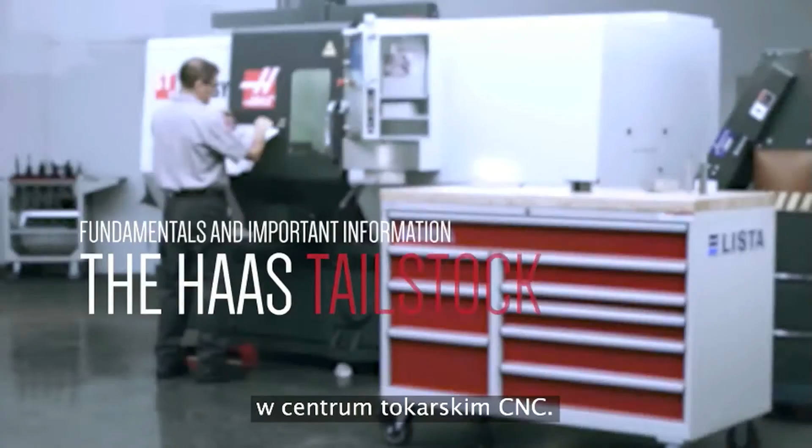Today, we'll discuss fundamentals and important information for using the tailstock on your CNC turning center. The tailstock option, available on all Haas lathes, adds versatility to the turning operations you can perform.

But what do you need a tailstock for? Slender, flexible parts are probably the most common application where tailstock support is required.

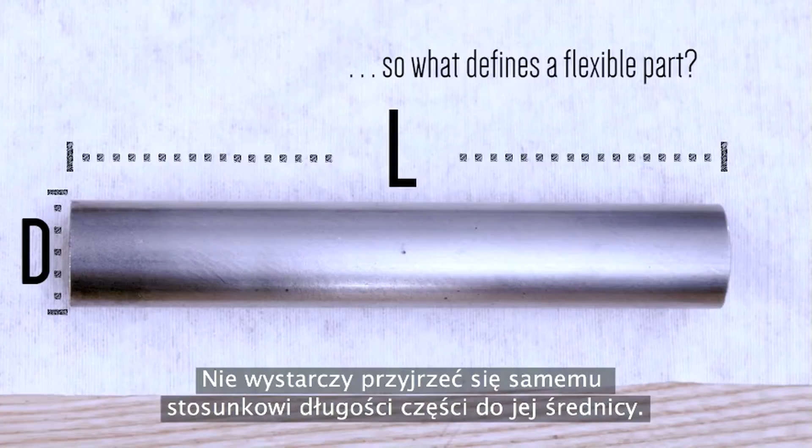So what defines a slender, flexible part? The most common way is to refer to its length to diameter ratio, or L to D, as it's often called. But let's be more specific. It really isn't enough just to look at the L to D ratio of the part by itself. When we grip the part, the effective L to D ratio changes.

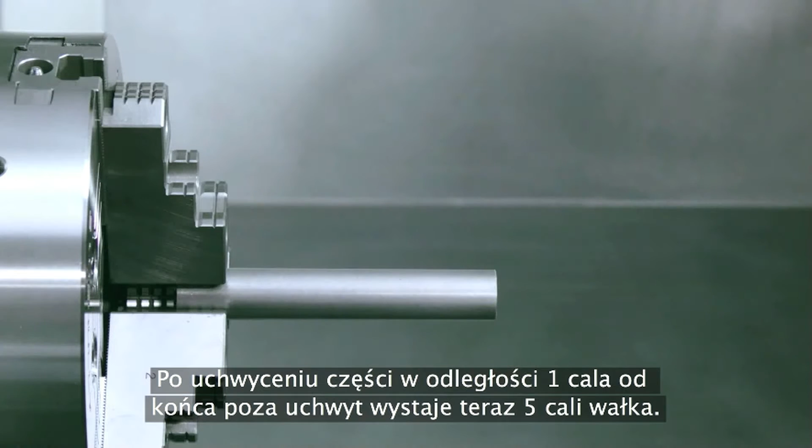Here we have a 6-inch long by 1-inch diameter shaft. Its length to diameter ratio is 6:1. Now we clamp this shaft 1 inch deep, with 5 inches extending outside the chuck. The unsupported region of the shaft has an L to D of 5:1. This unsupported region is what we need to consider.

With this much of the workpiece hanging out, there will likely be problems cutting unless tailstock support is added. However, the same 6:1 part, clamped with only 3 inches hanging out, will probably not need tailstock support, because now the unsupported region is only at a 3:1 ratio.

Once you've exceeded an L to D ratio of 10:1, parts become so flexible that even tailstock support may not be enough. So, to summarize: when unsupported L to D equals 3:1 or less, tailstock support is probably not needed. When a part's unsupported L to D ratio is above 3:1, it's time to start considering tailstock support. And when unsupported L to D is over 10:1, we'll definitely need tailstock support, and maybe something more, like a steady rest.

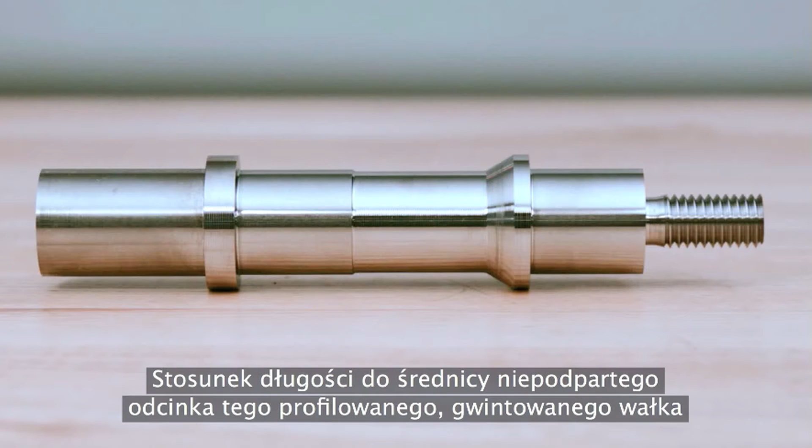This profiled and threaded shaft has an unsupported L to D that's beyond what is typically possible without a tailstock. Let's look at how you'd set up your tailstock for this part.

Here's the material we'll be starting with. We already completed Op 1, where we turned the bar stock down so we can grip it with our soft jaws.

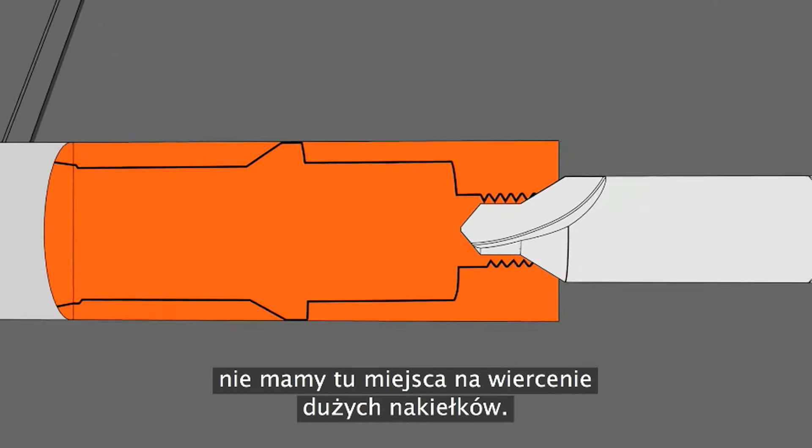Because our finished diameter will eventually get small at the tailstock end, we don't really have room for a large center drilled hole. So we'll choose this small number 3 center drill. The small center hole will also keep the live center's main diameter farther away from the end of the workpiece, since the live center doesn't sink as deep into the part. This provides additional clearance for the cutting path of the insert.

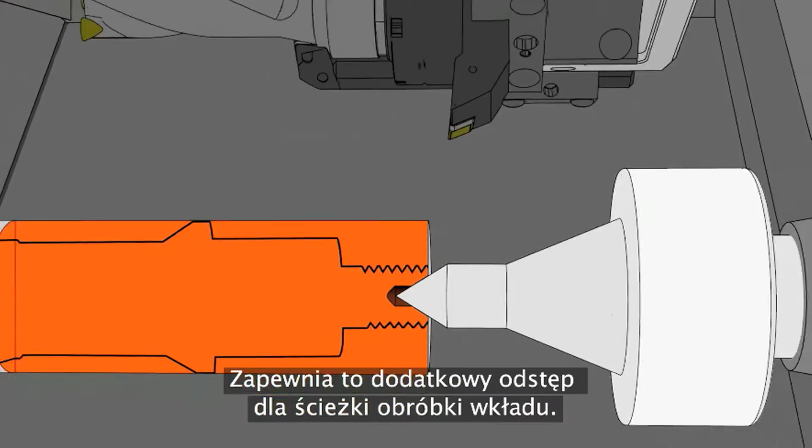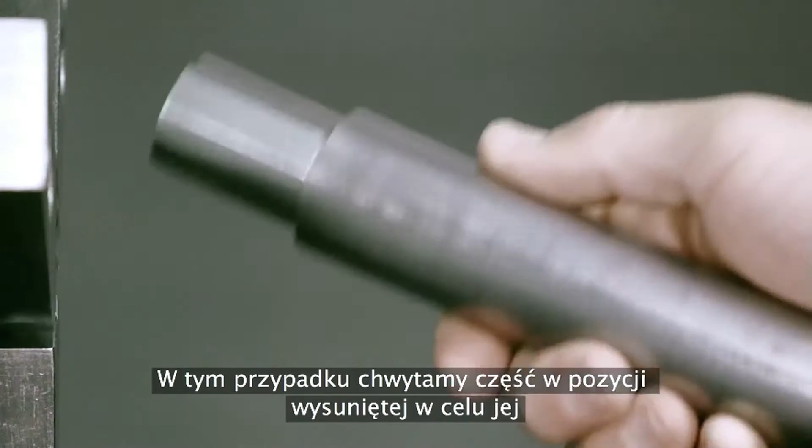But before center drilling, we need to prepare the end of the workpiece by facing it off. In this case, we grip the part in an extended position in order to face and center drill the part in the same place where the turning operations will occur.

If you're concerned about facing and drilling an extremely long part like this, you should choke up so only a few inches are hanging out, and face and drill close to the chuck.

You might be thinking, I've got this part sticking out pretty far—isn't it going to deflect during the cut? Good question. Let's face and center drill our part and see if it does deflect.

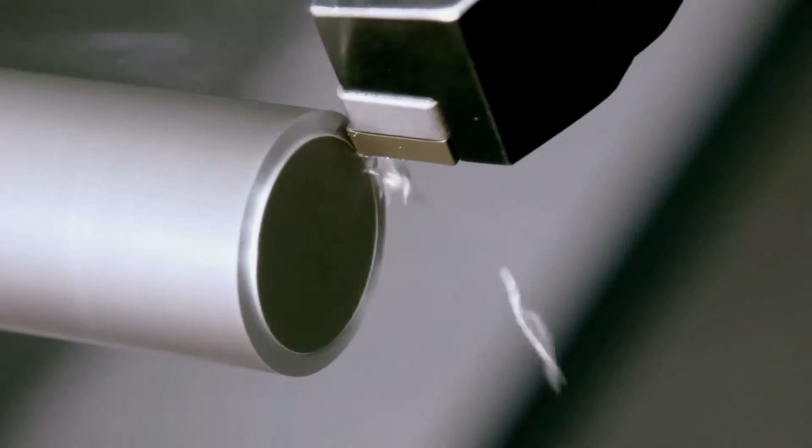For safety, the facing and drilling should be run at slower spindle speeds, with a slow feed rate and a shallow depth of cut, so the shaft won't whip or bend. An extended part should never be faced and drilled at high RPM or cutting loads. The part can be thrown and cause damage, injury, or worse. Exercise caution and common sense when deciding what's safe for your setup.

With the facing and drilling complete, let's check our part. Both the face we just turned and the center drilled hole have very low runout. Great!

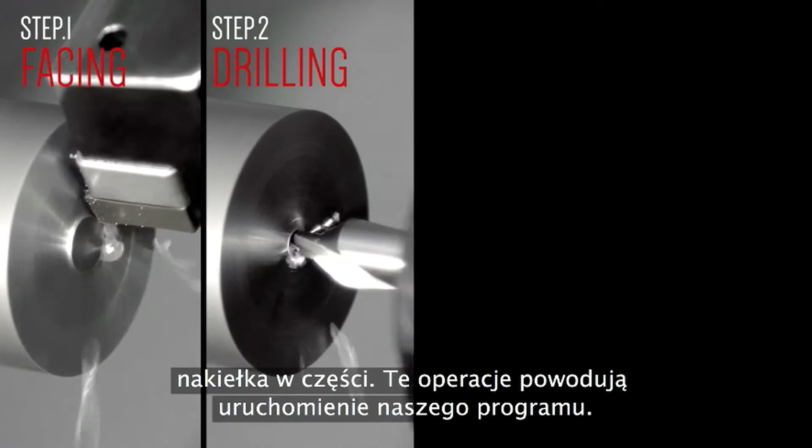Okay, so we just saw the part get faced off and center drilled. These operations start off our program. Next, the tailstock moves automatically into position. With the part supported, the cutting continues.

Using the Haas programmable tailstock, motion is initiated from within a program. No manual activation is needed.

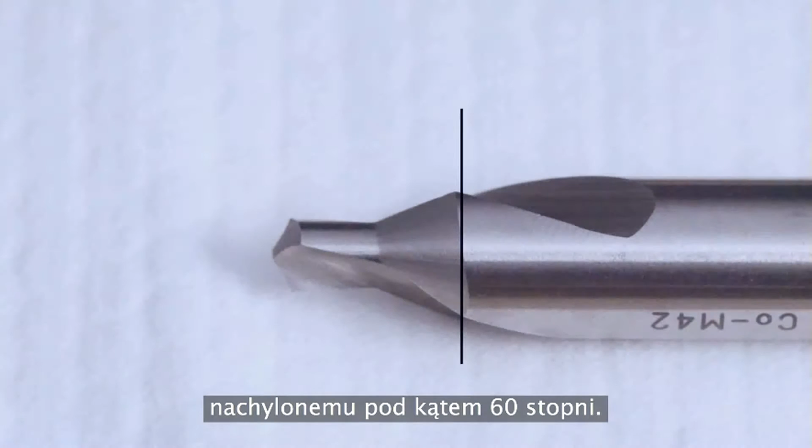Before we move on, let's stop for a minute and talk about center drill depth. We'll look at the important part of the center drill, its 60-degree cutting edge. The highlighted area shows us the full drill depth, but generally, you want to cut into your part up to about 90% of this full drill depth.

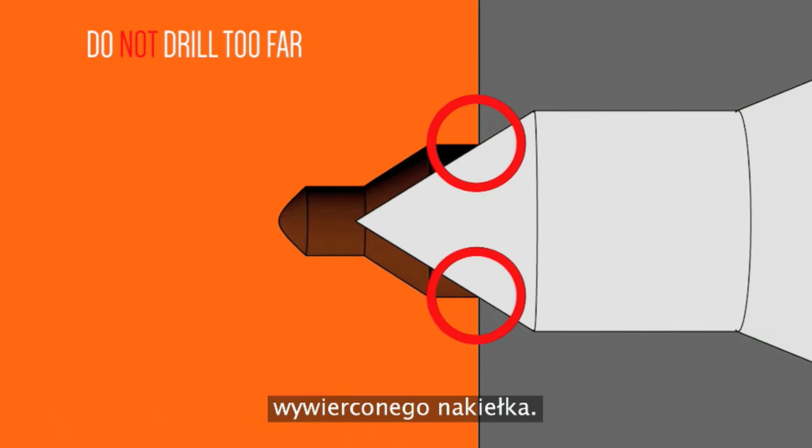Don't make the mistake of drilling so deep that you drill into the major drill diameter. Now, instead of a nice wide 60-degree flank, you'll be left with an edge at the face of the part, which will only offer a fraction of the engagement of a properly drilled center hole. Part stability will suffer.

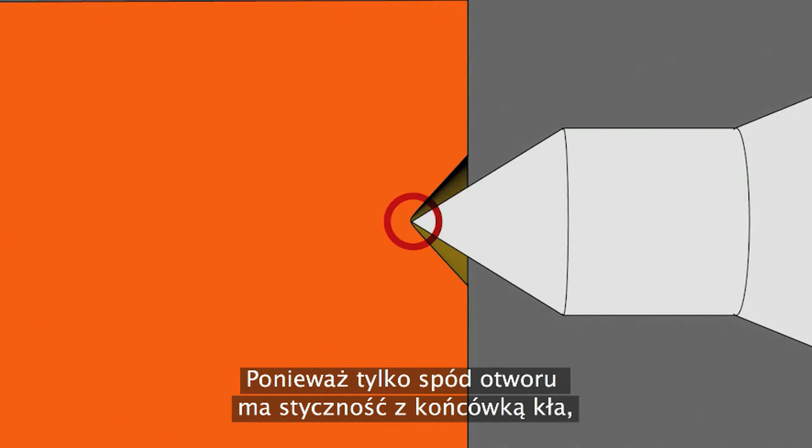And though it may seem like an obvious point, it's worth noting that a surprising number of people will mistakenly use a 90-degree chamfering drill to make their center holes. This is what the contact looks like when a 90-degree chamfering drill is used.

With only the bottom edge of the hole touching the center's tip, resistance to cutting loads will obviously be reduced. Always use a 60-degree center drill so the angle of the drilled hole will perfectly match the angle of the live center.

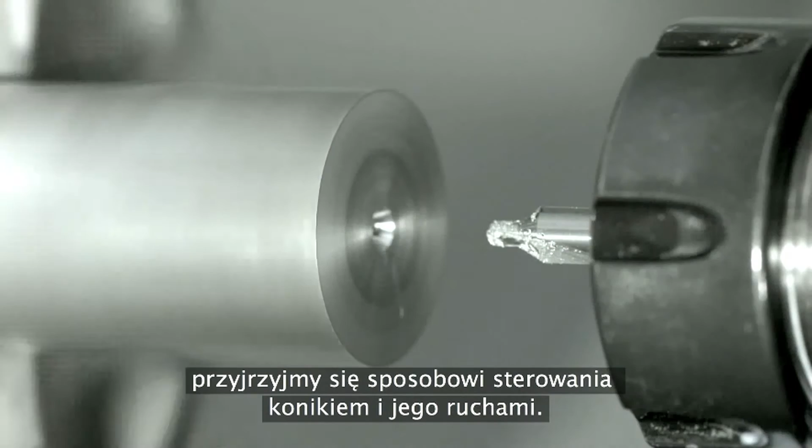Now that our part has a center hole, let's move on to how we command our tailstock and control where it moves. So, how would you tell the tailstock to move forward and retract? M21 is the tailstock advance command, and M22 is the tailstock retract command.

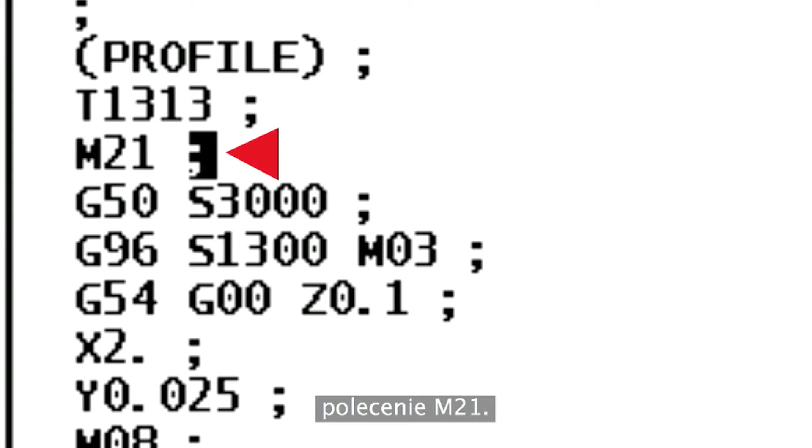Let's add these commands to our program. We cursor down to right after the first tool is called, and this is where we insert the M21 command. And at the program's end, this is where we'll insert the M22 retract command after axis motion is complete.

Still another way to initiate a tailstock move is to use the foot pedal. Whether it's commanded from a program or by the foot pedal, when the tailstock moves forward from home position, it moves to what we call the retracted setting 105 position. From here, it will move back and forth between the 105 retracted position and the 107 hold position as you clamp and unclamp your parts. We'll talk more about these settings in a minute.

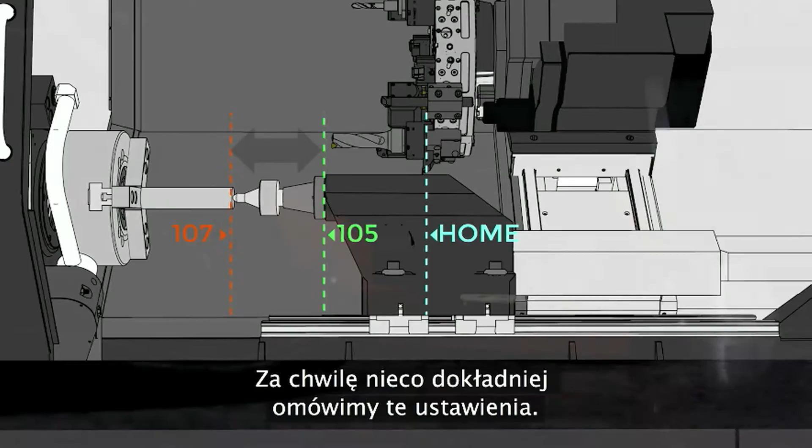When the foot pedal is used to put the tailstock in motion, either forward or in reverse, pressing the pedal a second time will stop the tailstock as a safety precaution. Once it's stopped, pressing the pedal again will return it to the retracted position. However, it's important to note, when an M21 or M22 command has been issued, pressing the foot pedal will not halt tailstock motion.

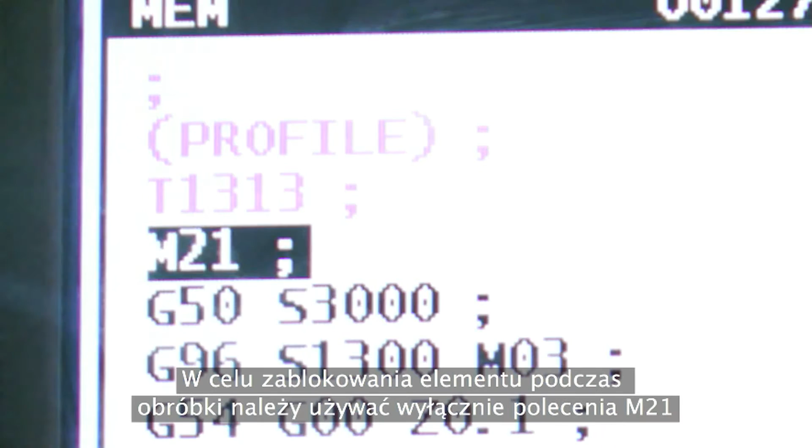And there are several other ways to move the tailstock. You can use the tailstock jog keys, handle jog the B-axis, or command a B-axis move. But none of these should ever be used to clamp the part. To clamp your part during machining, use only the M21 command, or the foot pedal to initiate the M21 move. This is the only acceptable way to clamp your part.

Using the handle jog keys, the rotary control, or commanding a B-axis move will not maintain full clamping pressure during cutting. With our M21 and M22 commands in place, let's look at where we're telling the tailstock to go.

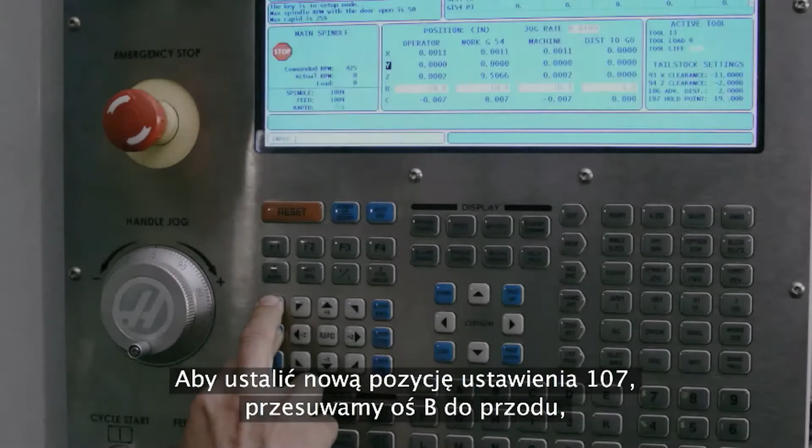We'll start with setting 107. This defines where the tailstock should be when it's clamping the part. To find a new setting 107 position, we jog B-axis forward until it touches the end of the part. The B-axis position is negative 23.3. We add negative 0.5 inches to the negative 23.3 value, and we enter this new value of negative 23.8 into the setting 107 hold point field.

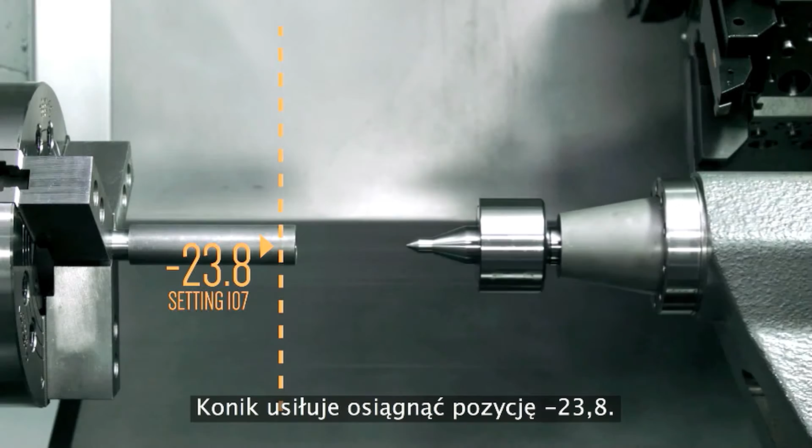This way, the tailstock tries to clamp at a point beyond where it actually touches the part, allowing for minor variations in part length. Let's test our new 107 value. The tailstock is trying to reach negative 23.8, but of course it stops when it hits the workpiece at negative 23.3. Great, the part is clamped.

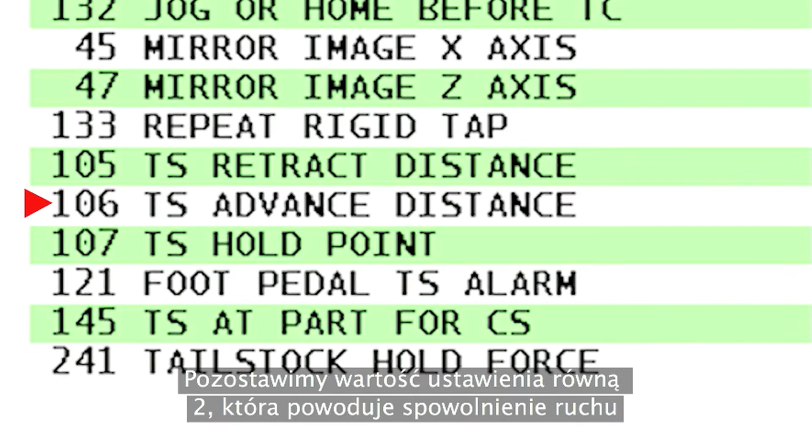How about setting 106? This setting tells the tailstock when to slow down from rapid motion. We'll leave it set at its present setting of 2, which slows motion 2 inches before the hold point.

With 107 and 106 out of the way, let's look at setting 105, which sets the retract point. Setting 105 defines how far away the tailstock retracts from the setting 107 value. Right now, setting 105 is set at 11 inches, and our tailstock is wasting a lot of time moving too far away. So we'll pick a new value of 3.5 inches. This keeps it closer when retracted, but it still gives us enough room to remove the part.

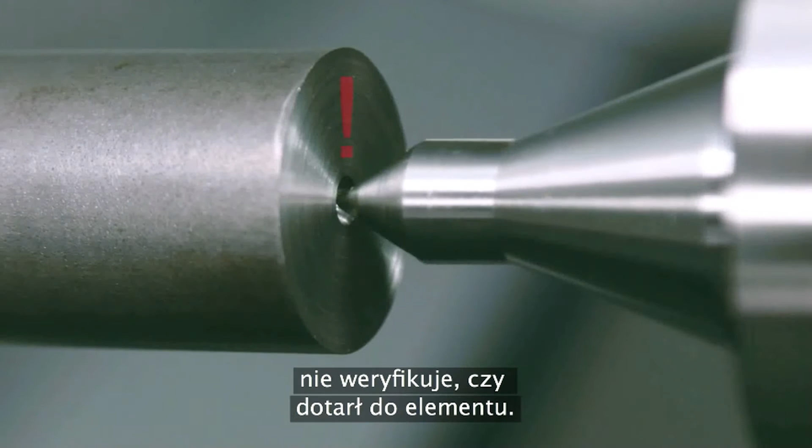Next, we've got setting 121. This is also important. When you use the foot pedal, setting 121 warns you when the tailstock is not clamping the part. Pretty handy. With setting 121 set to off, the tailstock moves to the 107 position, but it doesn't check if it's reached the part. So if your part isn't in the right place, the tailstock may not actually be clamping the part.

That's why we recommend setting 121 should always be set to on. That way, anytime the tailstock is activated, whether by a program or with the foot pedal, it will fault out if it doesn't find a part.

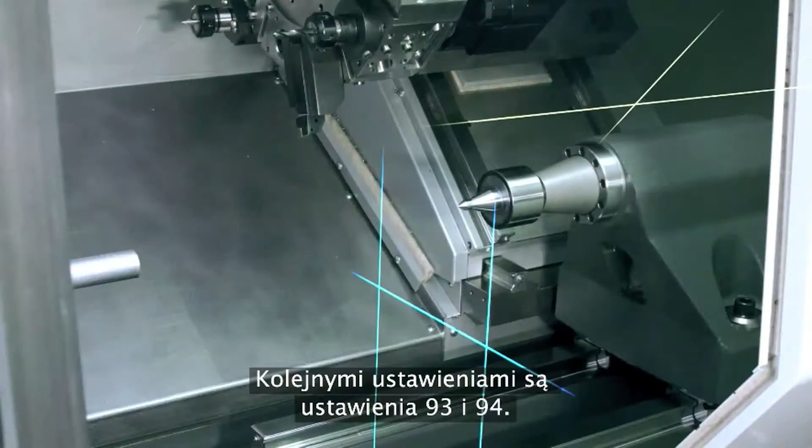Next, we've got settings 93 and 94. These define a region around the tailstock, which acts like an invisible shield. This shielded zone moves with the tailstock. Setting 93 is easy to visualize.

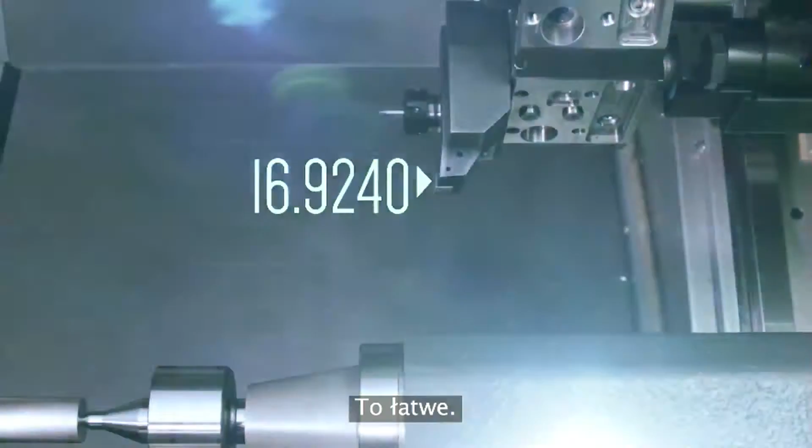It's the distance from X0 down to the edge of the restricted zone. To set this value, find the most extended tool on your turret and use that to check your clearance. We jog the x-axis down towards the tailstock until we found the clearance we're happy with. Looking at the x-axis position on the screen, the reading is -7.63, so we'll change setting 93 to a slightly smaller value, like -7.6. Now, when x-axis motion moves toward the tailstock, it will halt just shy of -7.6 before the tool can crash.

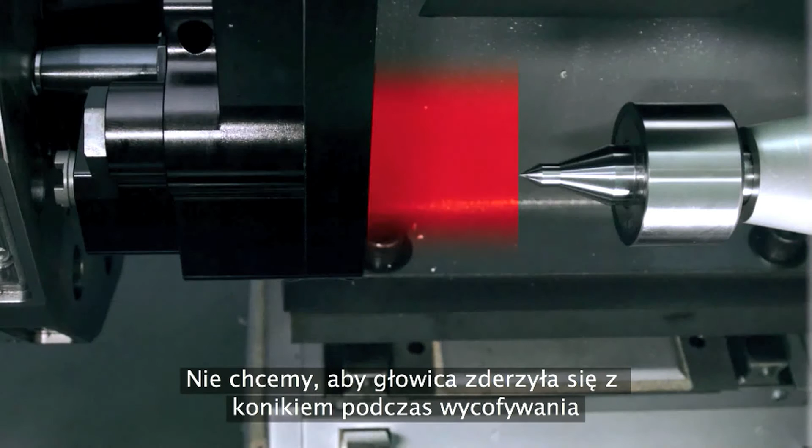Okay, setting 94 is a little trickier. Let's move the tailstock back so we can look at how it works. Say, for example, we need to drill the end of this part mid-cycle. We don't want the turret to hit the tailstock as we retract at the end of the drill cycle. Setting 94 represents the difference between the position of the tailstock and the turret along the z-axis, and it protects the tailstock from unintended z-axis moves.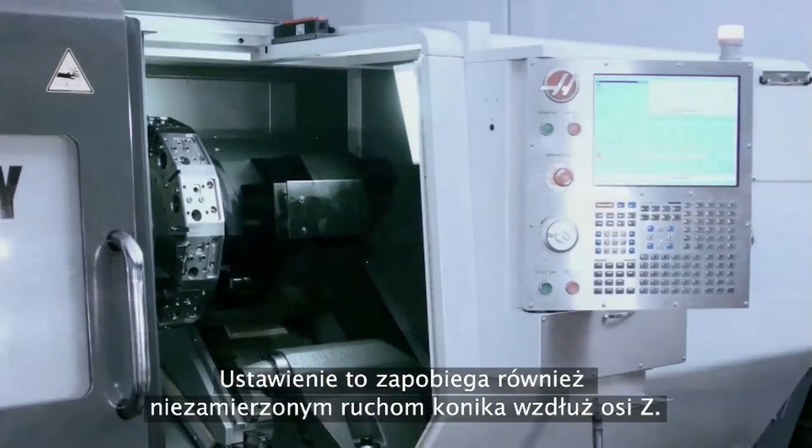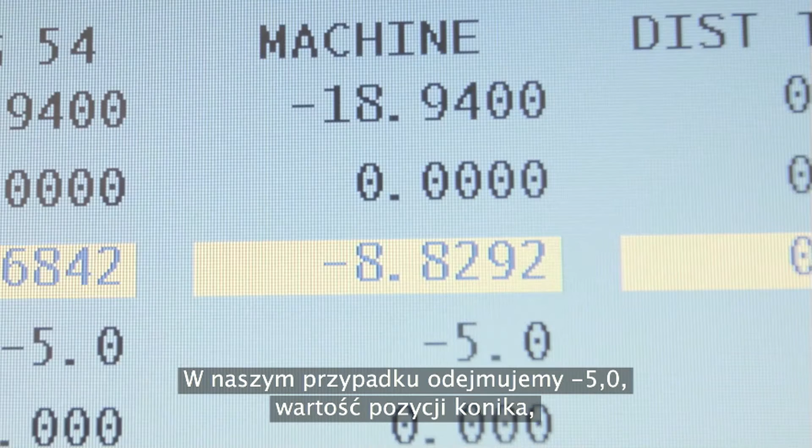Let's say, for example, we just changed to a different live center, and now we want to increase our setting 94 clearance value. This is how we would do it. You jog the z-axis towards the tailstock until you reach what looks like enough clearance. Then we look at the machine position value and subtract the b-axis from the z-axis. In our case, we subtract -5.0, the position of the tailstock, from -8.82, the position of the z-axis. This gives us -3.82. So let's round that up to a slightly larger value, just to be safe, for setting 94, to halt the tailstock motion whenever it reaches this new distance.

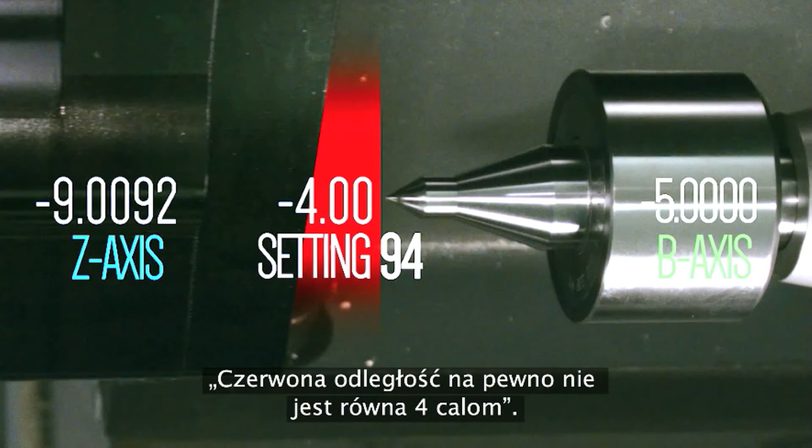When you take a closer look at this graphic, you might say, well, that red distance is obviously not 4 inches. Remember, setting 94 is actually the difference between the z-axis and the b-axis machine positions.

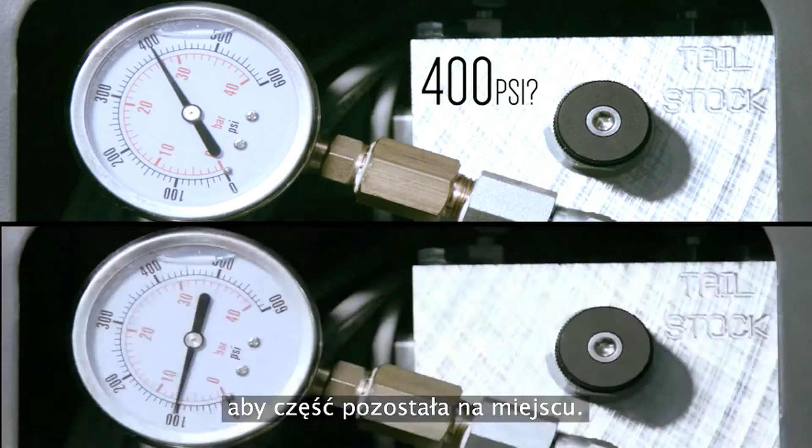So we know how to control the tailstock's position and protect it from crashing. We're ready to clamp our part. But one question remains: how much tailstock pressure should we use? Many machinists believe it's best to use as much tailstock pressure as possible so the part doesn't come out. Others believe you should hold your part with as little pressure as possible so you don't deform your part.

You might be thinking, well, why shouldn't I just use max tailstock pressure all the time? Well, one important reason is, as tailstock pressure increases, deflection in the workpiece and in the machine also increases. Sometimes this can affect accuracy and repeatability. You can also increase wear on your live center, and now you're adding more force to the already existing axial cutting forces, which are trying to push the part inward past your jaws or collet.

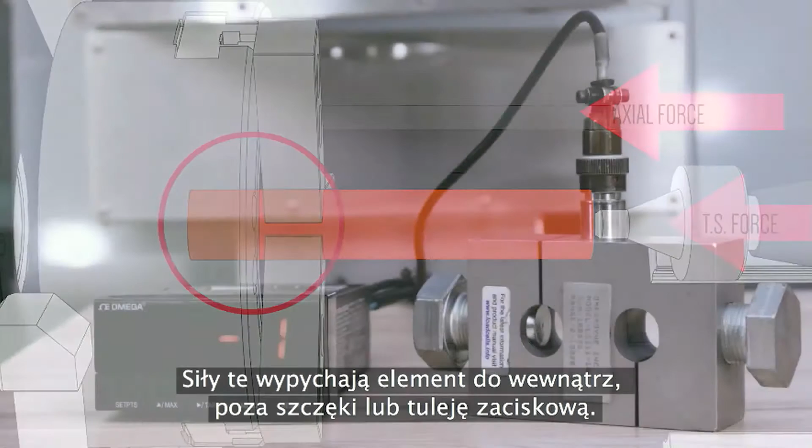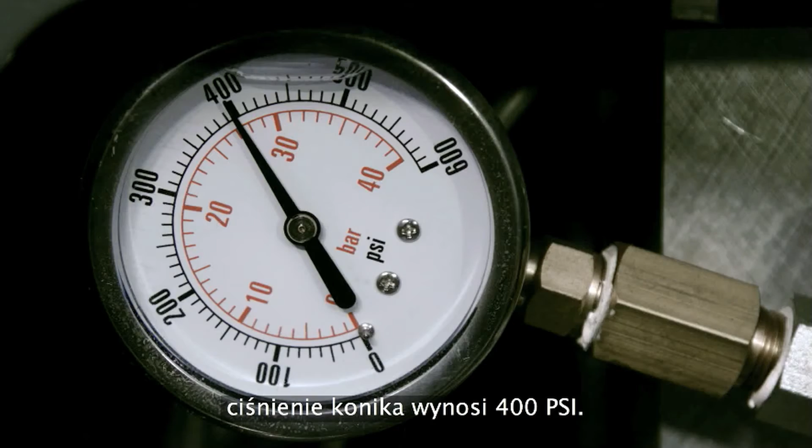To explore this question, we're going to perform a few more of our famous real-world tests to demonstrate why we here at Haas recommend starting with a tailstock pressure of 200 psi when setting up a new part. First, it's helpful to figure out how much force is actually being applied when we set the tailstock to 400 psi. Using this load cell, we can see that our max tailstock pressure at 400 psi translates to a little over 1,200 pounds of force, the same as what the chart on the side of the machine says.

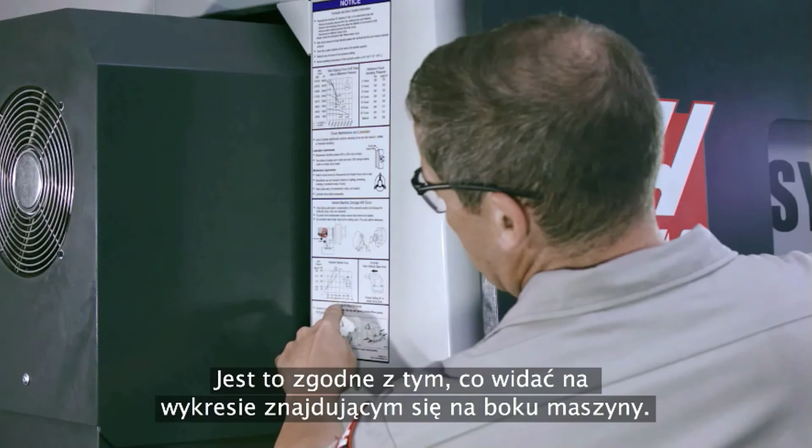Let's start with a static test to see if part deflection is affected by tailstock pressure. We've got this 1-inch diameter shaft held 10 inches out from the chuck, with the tailstock clamping it at 200 psi. To simulate a cutting force, we'll use the x-axis to push with the turret against the load cell, which in turn will push against the shaft. And finally, we'll use an indicator to measure how much the shaft deflects as the load increases.

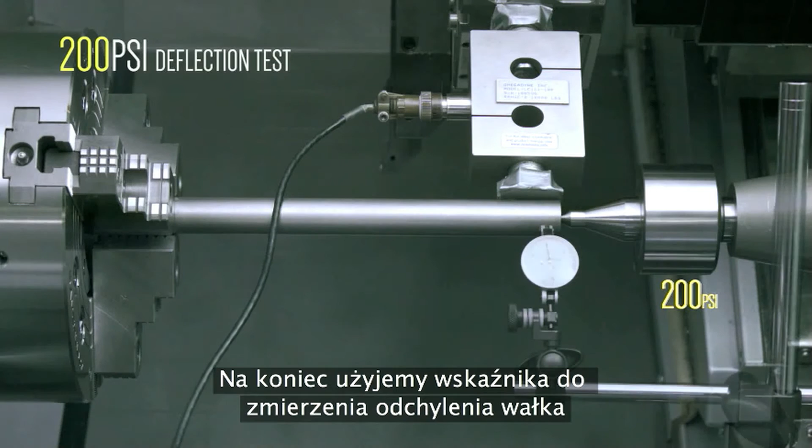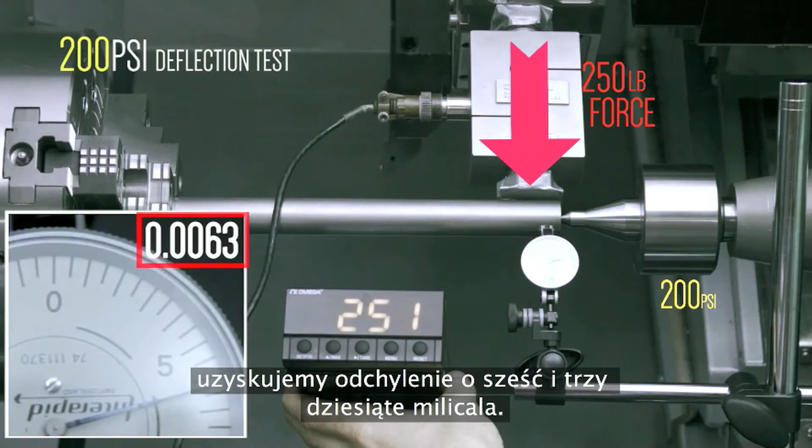Okay, so we're jogging x-axis in tenths mode to apply a radial load of 100 pounds at the end of the workpiece. The end of the shaft deflects 2 thou 5 tenths. Increasing the load to 250 pounds of force, we get a reading of 6 thou 3 tenths. Here is a summary of these results.

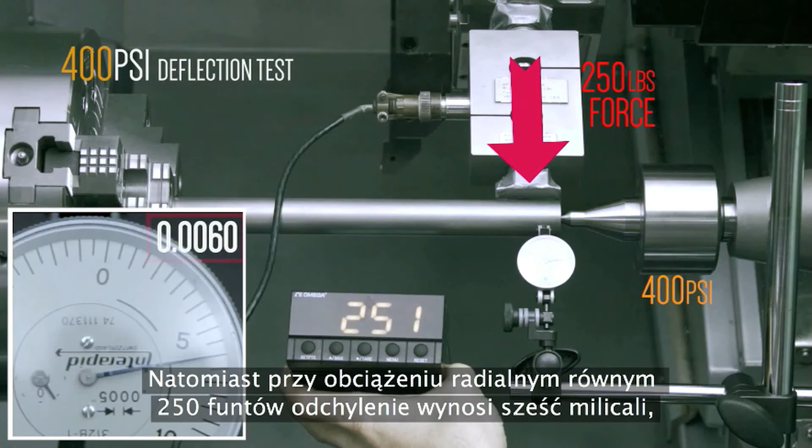For the next test, everything's the same, except this time we're going to use a tailstock force of 400 psi. At the 100 pound radial load, we get 2 thou 5 tenths again. And at the 250 pound radial load, we get 6 thou, which is only a few tenths different. Let's take a look at these results side by side and compare. As you can see, there's no difference for the 100 pound load and just a slight difference at 250 pounds. Okay, that takes care of our static test, and the results are clear. Tailstock pressure had little effect on part deflection.

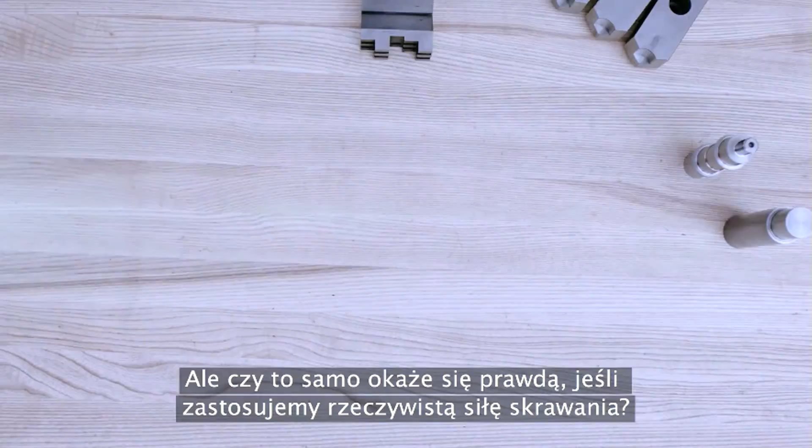But do these findings hold up once we've applied real-life cutting force? Let's find out. We'll be cutting this 2 1/4 inch diameter bar stock.

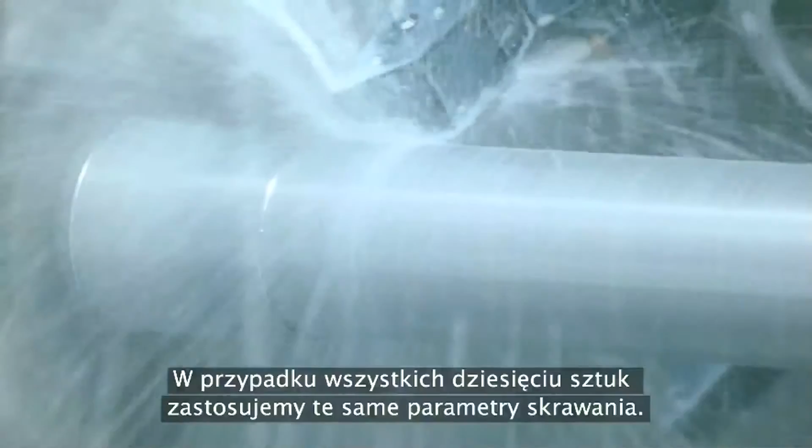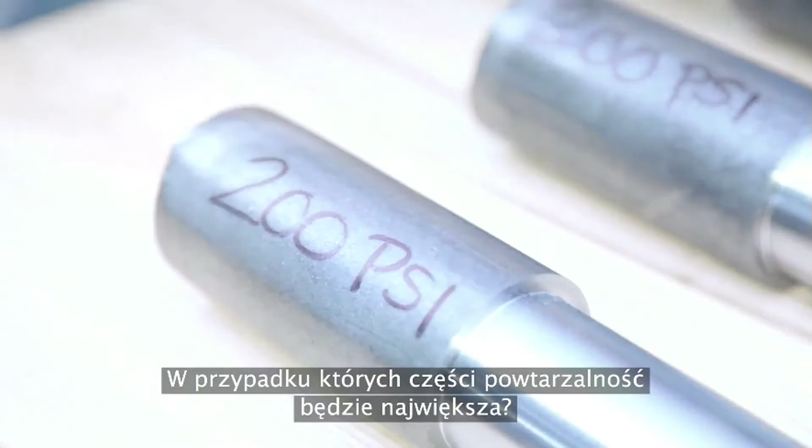We're going to take 5 pieces of this material and cut them at 200 psi. Then we'll take 5 more pieces of that same material and cut them with a tailstock pressure of 400 psi. We'll use the same cutting parameters for all 10 cuts, then line them up and measure them for differences in size and profile. What would be your guess? Which parts would have the best repeatability - the ones cut at 200 psi or the ones clamped at 400 psi tailstock pressure?

For the 200 psi shafts, we take measurements at both ends of each shaft to get a taper value. Then we compare these 5 values to find how much the taper varies for all 5 shafts. The taper varies by 6 tenths.

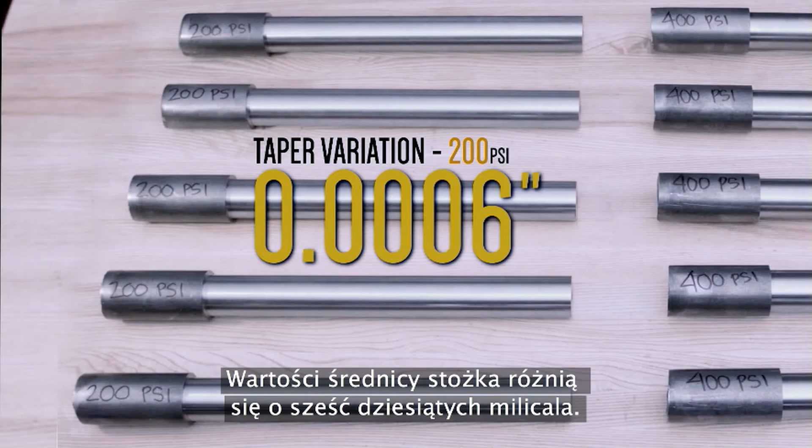Now let's do the same thing for the 400 psi shafts. We find the taper for each shaft and compare these values. The 400 psi shafts vary by 5.5 tenths. Maybe this seems surprising, but we can clearly see that more tailstock pressure did not make the shaft profiles any more consistent. The large shaft that we just cut had a supported L to D of 8:1.

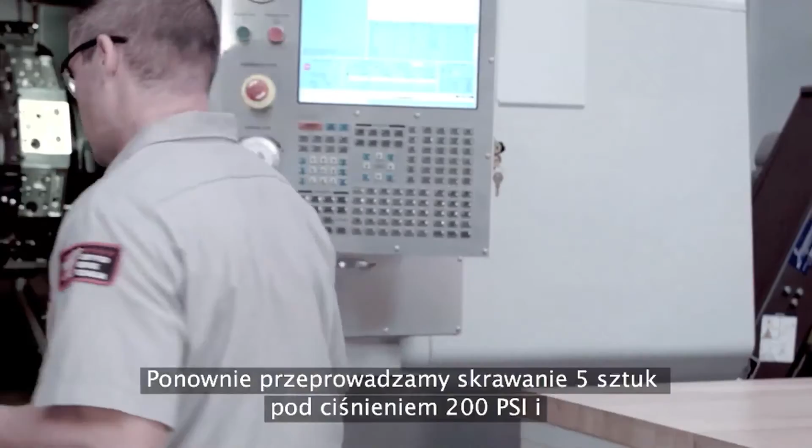But let's repeat this test on a different shaft to see if this trend holds up. This shorter shaft has a supported L to D of about 10:1. Again, we cut 5 pieces at 200 psi and 5 other pieces at 400 psi using identical cutting parameters. We check diameters and find our taper values. Comparing the taper values, we find the 200 psi shafts vary by only 2 tenths.

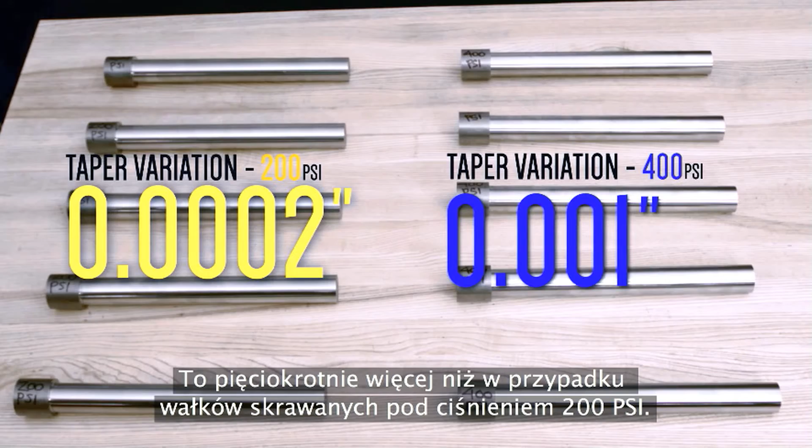And finally, looking at the 400 psi shafts, surprise! The taper variation is 1 thou, 5 times greater than the 200 psi shafts. In this case, setting tailstock pressure to 200 psi gave us more consistent results. Admittedly, this is a small sample of parts, but it supports what we found in testing here at the Haas factory, and we think it demonstrates that 200 psi serves as a good initial tailstock pressure setting.

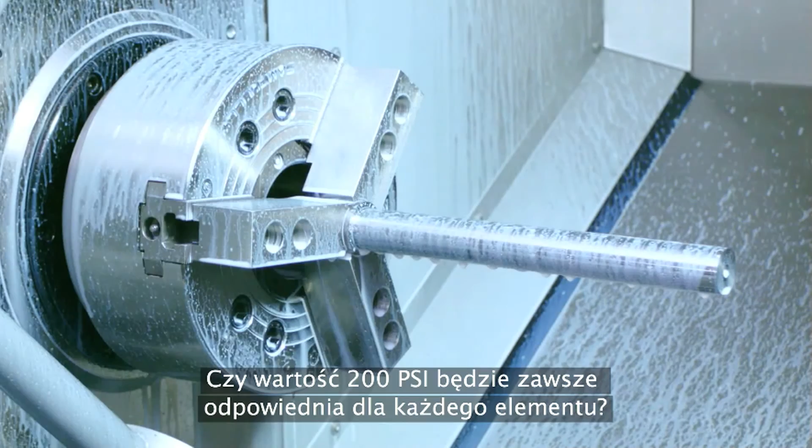Will 200 psi work for every part every time? Most likely not, but again, it's a good place to start. We hope this section is helpful for the folks who are working with stouter parts. But what about parts that deform easily? To recap, for stout parts, we just recommended a tailstock pressure of 200 psi as a good baseline. But with fragile parts, this doesn't always work.

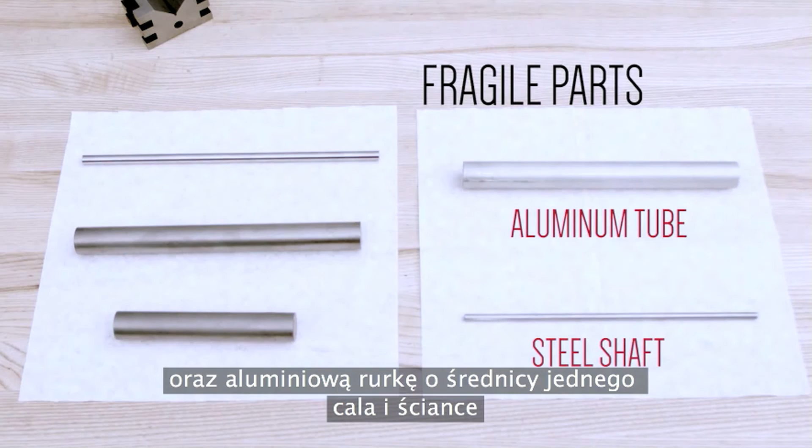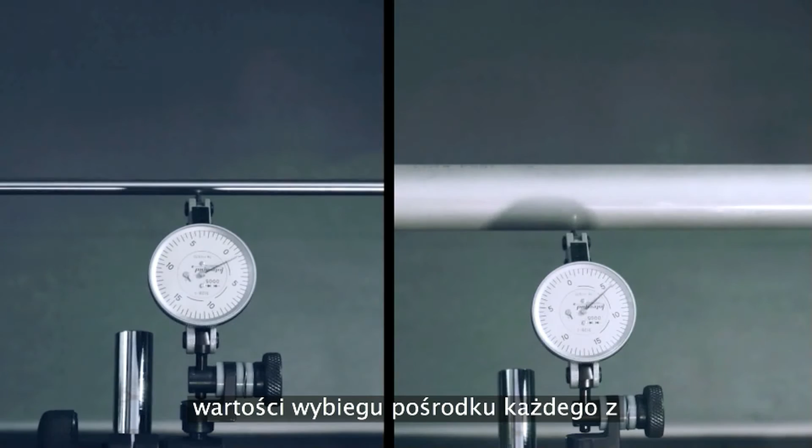Here we have a 1/4 inch diameter steel shaft and a 49 thou wall 1 inch diameter aluminum tube. How much pressure will it take to deform them? Starting with the parts held at 100 psi, we'll measure runout at the middle of each part as we make 100 psi tailstock pressure increases.

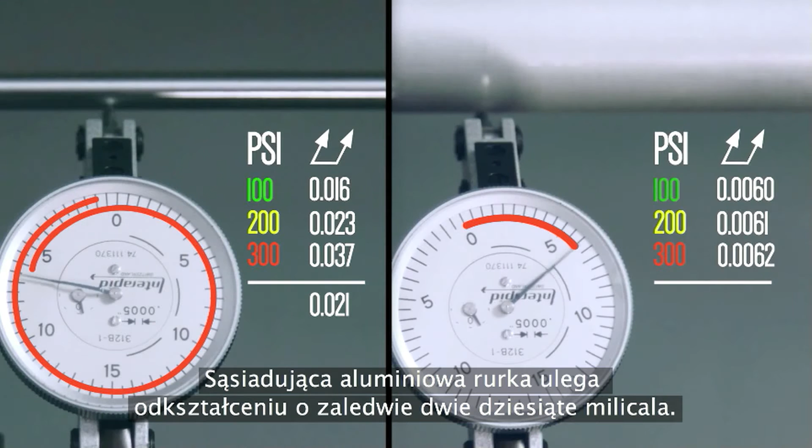Okay, starting at 100 psi, increasing to 200, and then 300, the steel rod deforms significantly by an additional 21 thou. Its neighbor, the aluminum tube, deforms by only 2 tenths. All the way up to 400 psi, the end of the aluminum tube permanently deforms. Meanwhile, at 400 psi, the steel rod bends so much we don't need an indicator anymore.

Okay, so why did we show you this? We want you to realize that 200 psi will probably not work for some weaker parts. The point is, when your part is fragile, take some measurements to find where it starts to deform and keep your tailstock pressure below this point.

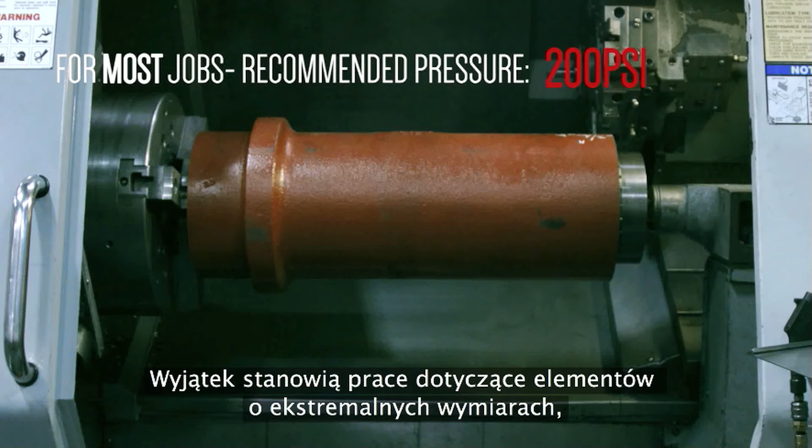We've covered a lot. Let's look back for a moment and summarize our recommendations. For most turning jobs, we recommend starting with a tailstock pressure of 200 psi, except at extremes of part size, weight, and cutting load. When your workpiece is very slender or made from weak material, tailstock pressure should be run in the 100 to 200 psi range based on your measurements.

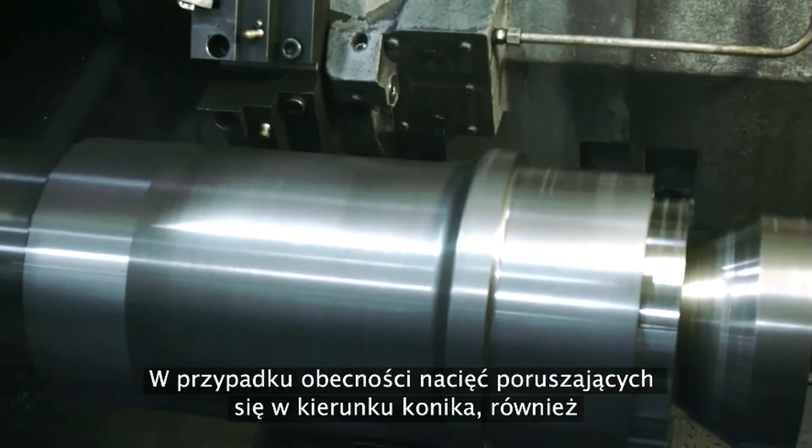And how about really heavy parts? When your part is very heavy, it does make sense to use tailstock pressures between 200 and 400 psi. And when you have cuts that are moving towards the tailstock, it's also a good time to consider running at a tailstock pressure above 200 psi to counter the axial forces that want to pull the part out of the chuck.

Okay, so can we run our part already? Yes, but before we do, there's one more thing to consider: the live center. This connects the part to the tailstock. It must rotate freely, it must locate the workpiece precisely and rigidly on center, and it must accept the speeds and loads your machine will exert.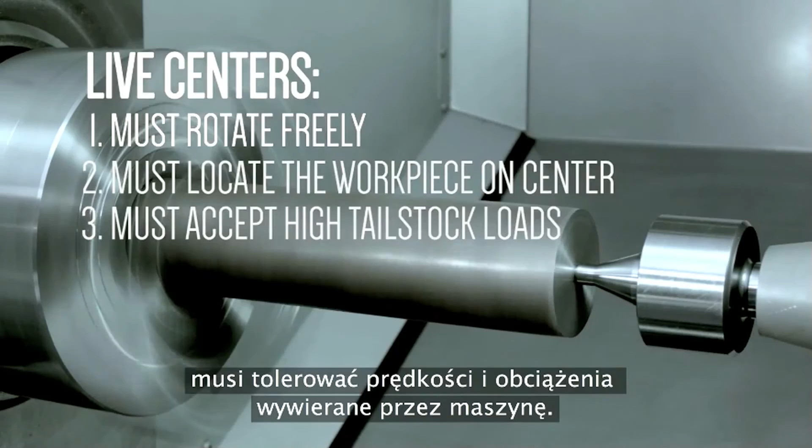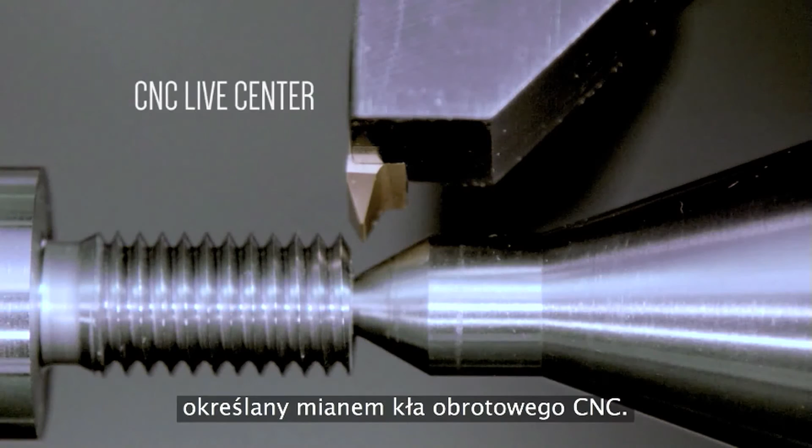Live centers come in many sizes and shapes to fit your tailstock while allowing the best access and support for your parts. In our example, because our part reduces to a relatively small threaded diameter at the tailstock side, we're using what's often called a CNC live center. The reduced diameter shank on this live center allows more room near the end of the part for threading and other finishing tools.

If we were using a standard point live center, we'd have to be very careful not to make some contact here. Let's look at the CNC and standard point center side by side. We've already mentioned that the CNC center gives you more clearance, but it is weaker, so it may introduce some chatter. By comparison, the standard point center is more rigid, so you might opt to use it to cure chatter problems.

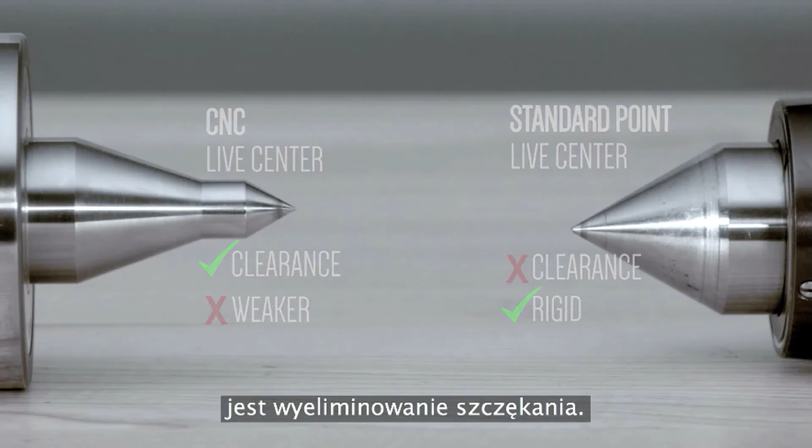Now, live centers have three main characteristics that you need to keep in mind when setting up your job: maximum RPM, part weight limits, and axial force limits.

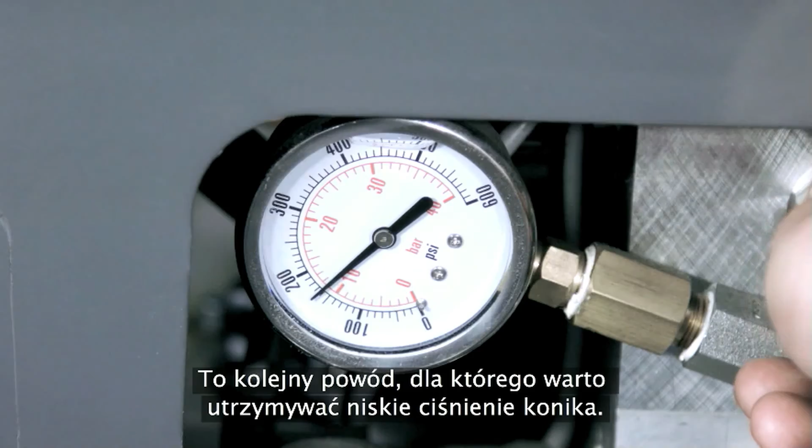If you were to max all of these out, your live center would wear down and last a fraction of its normal life. On the other hand, when you run your live center at moderate RPM and weight loads, tailstock force becomes the main factor in live center life. Yet another reason to keep your tailstock pressures low.

Live centers do wear out, especially if they are mistreated or abused, so take good care of your investment. Let's check the condition of this used center. First, we're going to check out how smoothly the bearings roll. Rotate the tip 4 revolutions, and then keep rotating in that same direction, feeling for smoothness of rotation.

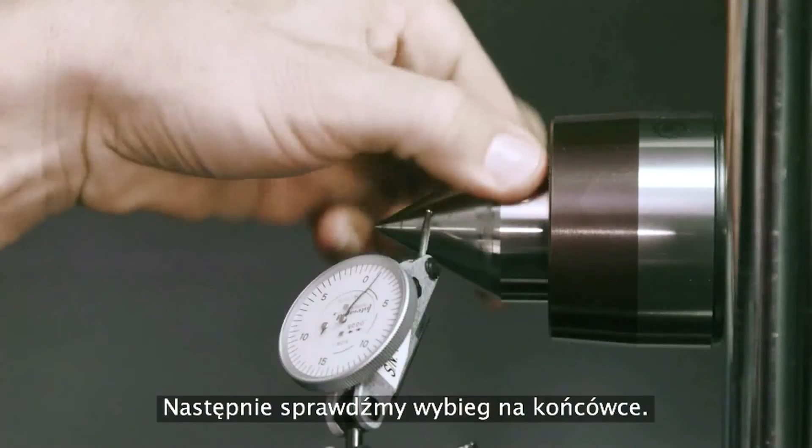If it's smooth, the bearings are likely in good condition. Next, let's check the runout at the tip. The reading is a little jumpy and it's above this live center's specifications, but it's still acceptable for the parts it's supporting. In contrast, here we have a well-worn center.

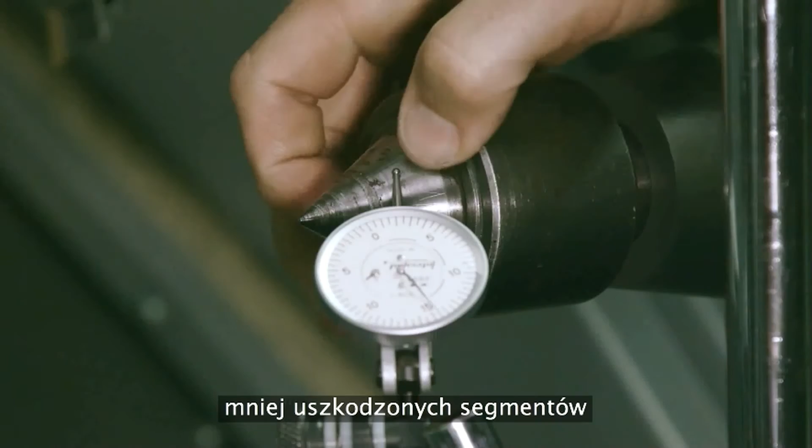The tip has significant damage, and when we indicate even the smoother sections, we get jumpy indicator movements. These bearings and the center's tip are damaged. It's time to rebuild or replace this center.

Make sure that the tapered side of the live center is clean, rust-free, and has no dings or other damage. Visually inspect the condition and cleanliness of the taper in the tailstock as well. There should be a perfect sliding fit into the tapered tailstock bore.

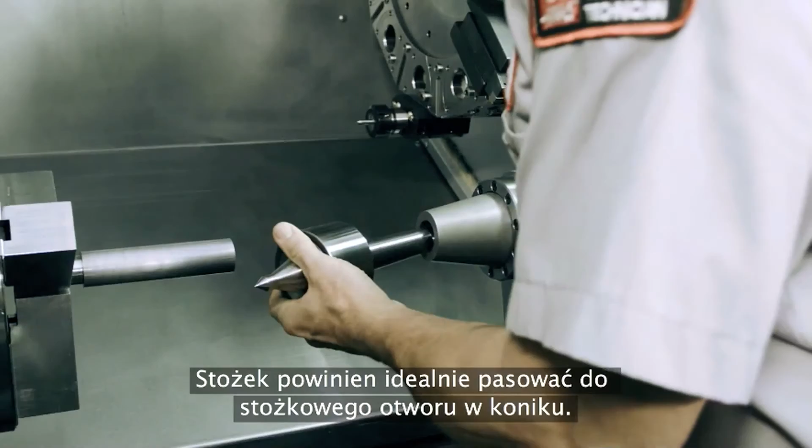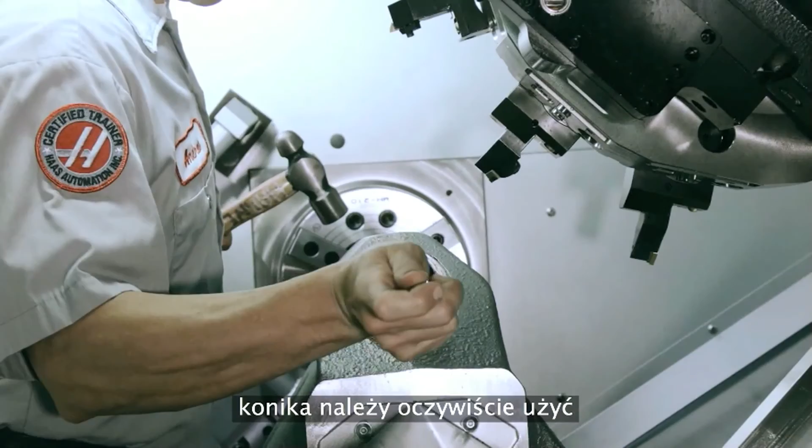The correct method for removing the live center from the tailstock housing is, of course, to use a steel drift and hammer to break free the taper's tight fit. A badly stuck live center is rare. If it does happen, contact your local HFO service rep.

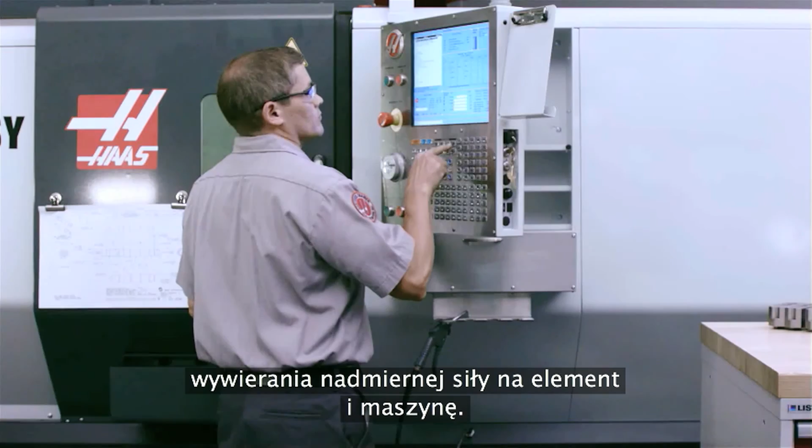Okay, can we make our part now? You bet. Let's return to the profiled and threaded shaft we looked at the beginning of the video. We'll use a tailstock pressure of 200 psi, since we know this is more than sufficient to keep our part in place without any unnecessary amount of force on our part and machine.

With all the aspects of our tailstock support accounted for, we're ready to run our program. But instead of just watching this part run with the tailstock supporting it, we thought it'd be a good idea to watch how it performs running alongside a separate run made without the benefit of tailstock support.

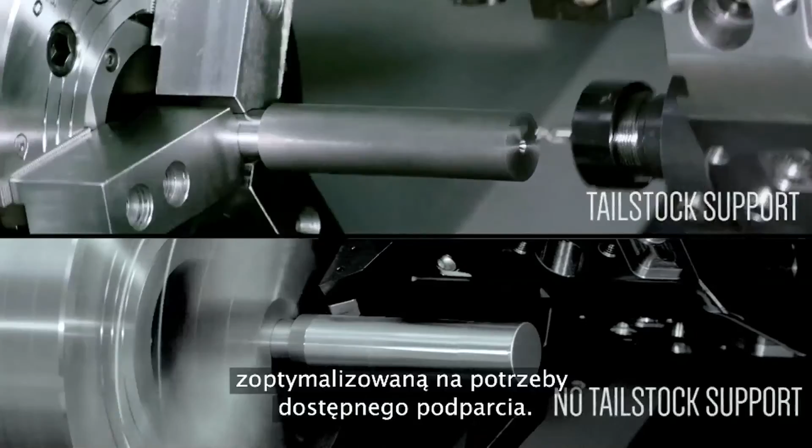Each of these parts are running with speeds and feeds optimized for the amount of support available. Machinists sometimes worry that they'll lose time waiting for the tailstock to clamp their part, but tailstock support usually allows higher speeds and better finishes. The tailstock supported part is able to run considerably faster since it is held in a much more rigid state.

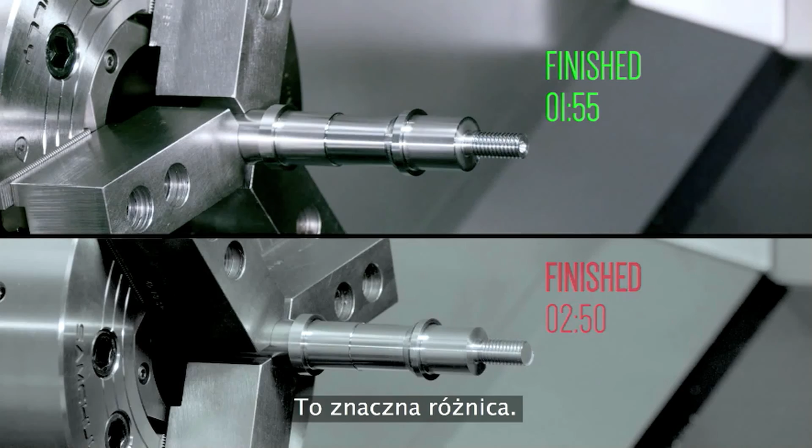As our part reaches completion, we can see that even though the tailstock supported part started cutting after the unsupported part, in the end, it finished well ahead with a lower cycle time. It took 1 minute and 55 seconds to cut the tailstock supported part, and 2 minutes 50 seconds to cut it without support, a significant difference. We can also see visually there is significant chatter on the front journal as well as in the threaded section of the unsupported part, whereas the same areas on the tailstock supported part look good.

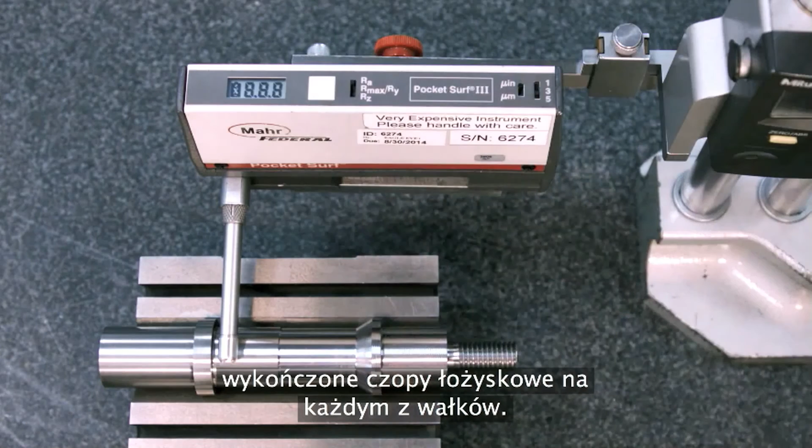Let's see what the actual difference in finish is between the unsupported and supported parts. To make an accurate comparison, we use a surface finish checking instrument to measure both of the finished journals on each shaft. First, we check the rear journal on the unsupported shaft and find a reading of 59 micro-inches. Moving to the front journal, we find a much rougher finish of 121 micro-inches. This should be expected since this feature is cut hanging out at a 4.5 to 1 length to diameter ratio.

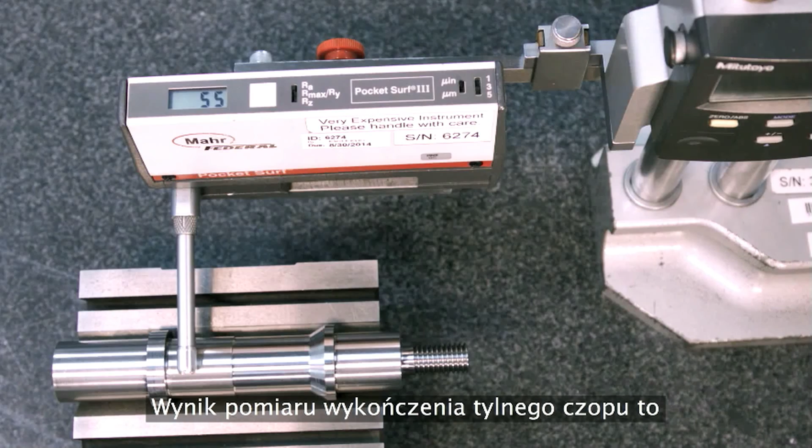Moving on to the tailstock supported part, the rear journal has a finish of 55 micro-inches, and moving forward to the front journal, we find an equal value of 55 micro-inches. It's easy to see there are great reasons for using tailstock support.